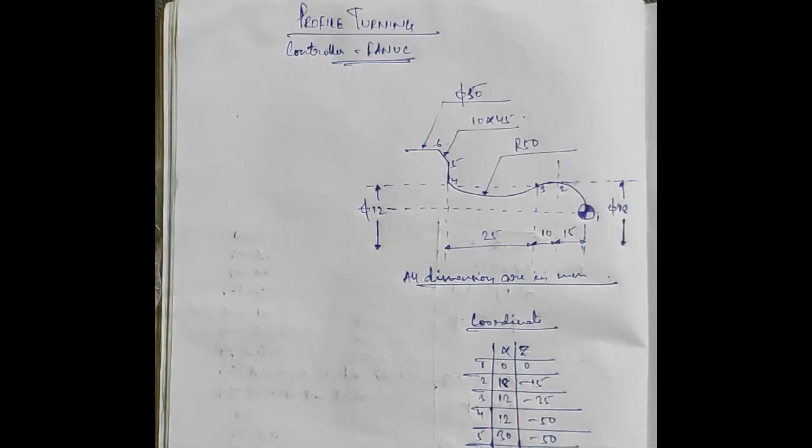Hello friends, today we are going to learn profile turning operation. Controller will be the usual Fanuc.

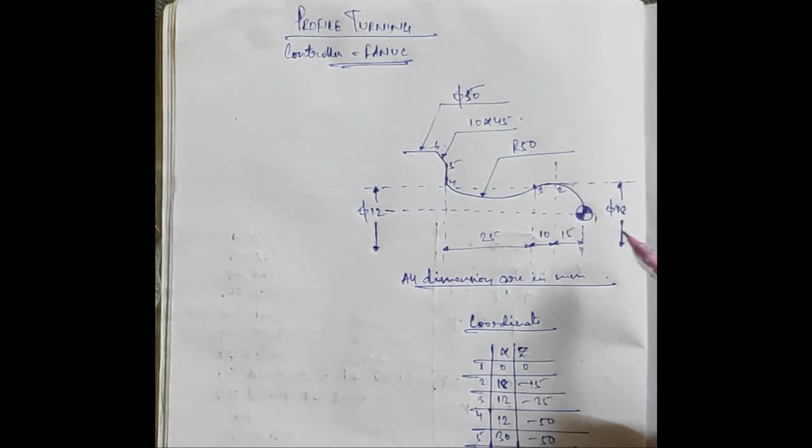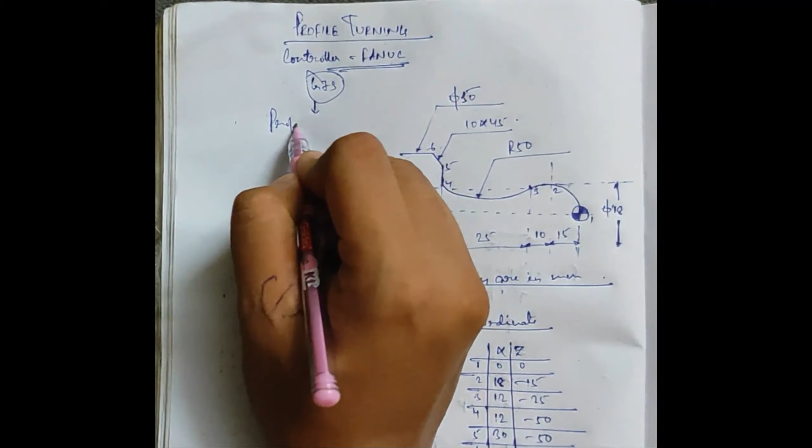Okay, so let's assume this is your profile. It looks like a chess pawn. We are using G73 for this operation, which is a profile repeating cycle. Let's discuss this profile.

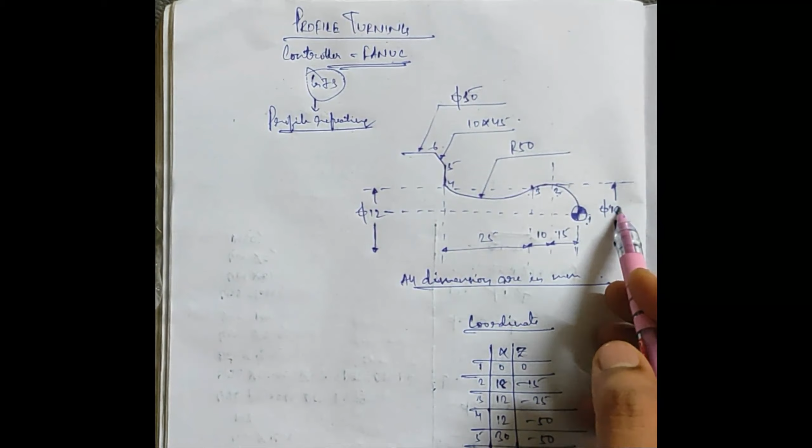This is your point number 1, this is 2, 3, 4, 5, 6. The coordinate for point number 1 will be 0, 0. Coordinate for point number 2, diameter is given, so X will be 18. Z is also given, which is minus 15.

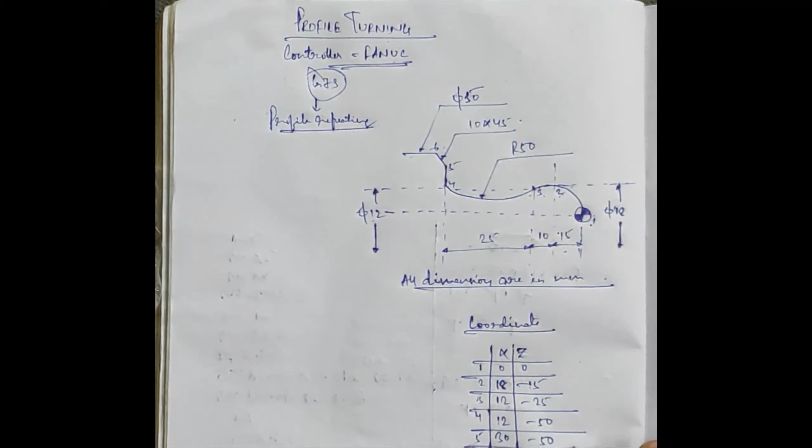Point number 3, X is 12, Z is minus 25. Point number 4 and 3 lie on the same line, so diameter will be the same at point number 4. So it's again X12, Z minus 50. At point number 5 X will be 30 and Z will be the same.

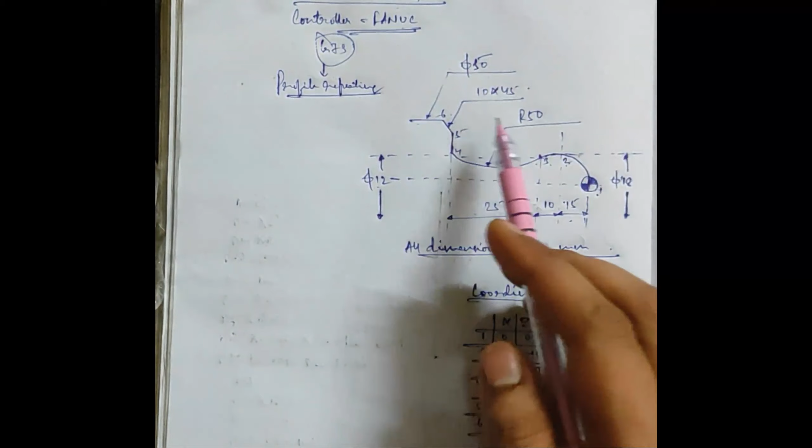At point number 6, X will be 50, Z will be minus 60. So let's begin the program.

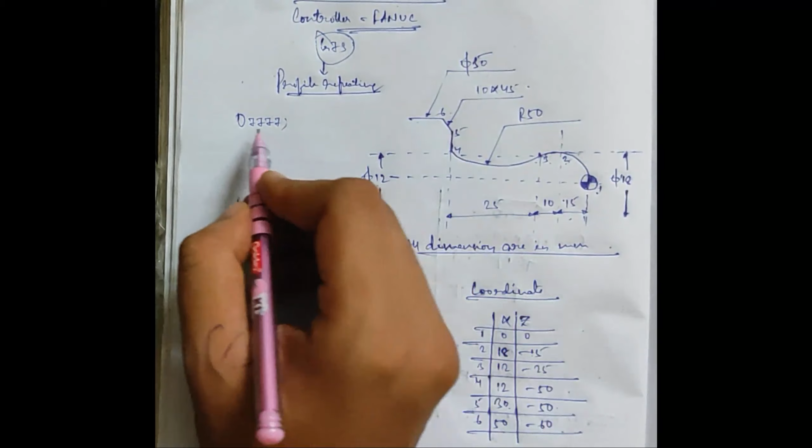G92, S1000, M4, G96, S300.

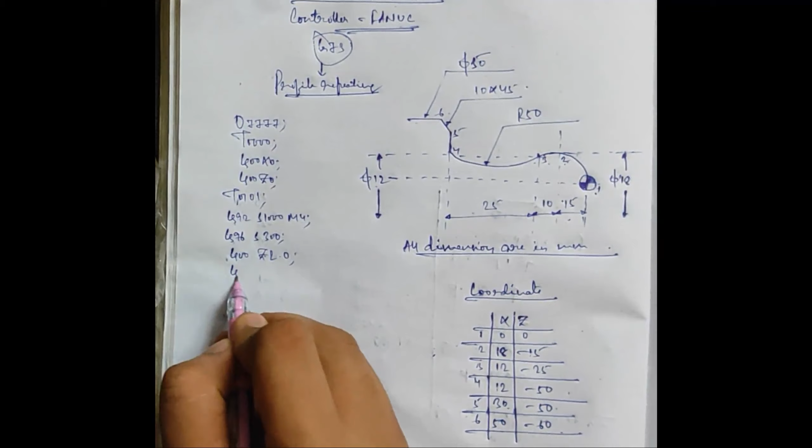Okay, then take safety: G00 Z2.0, G00 X52.0, then coolant on, M7.

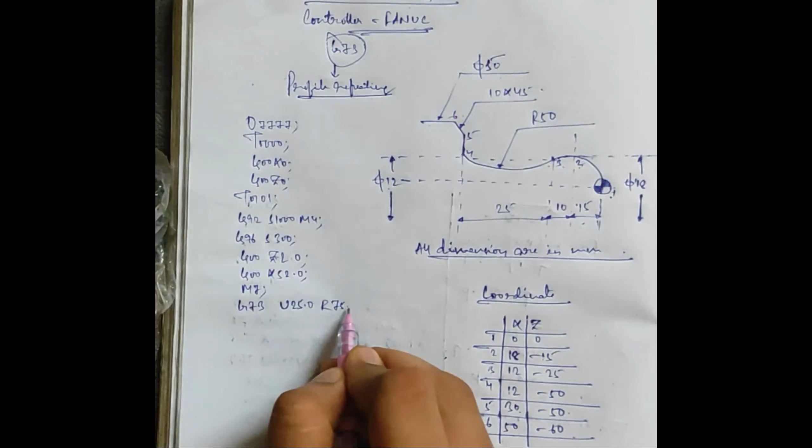So G73 is your profile repeating cycle, let's use that one. G73 U25, R will be how much? R will be, I think, 75 - we'll discuss that later. Let's first complete the program. Then again, G73 P10 Q11

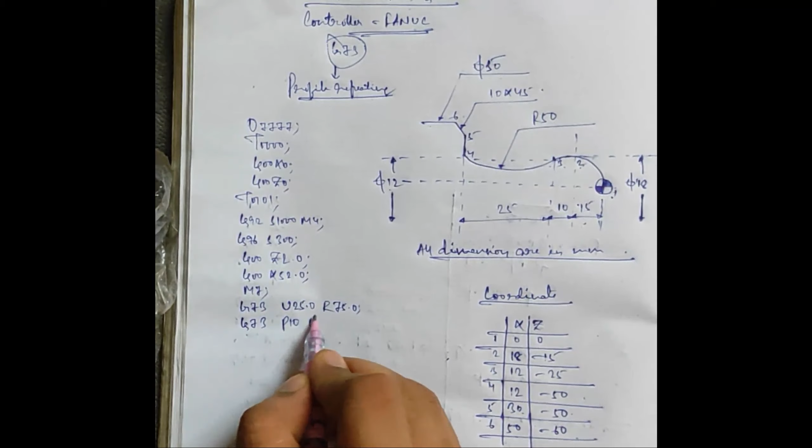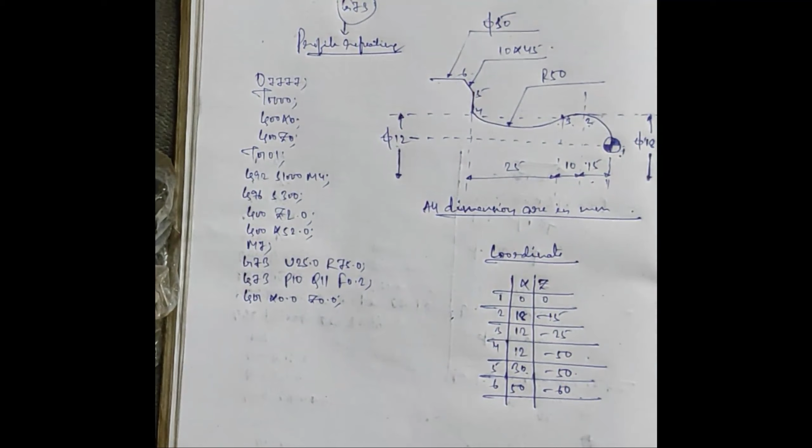F0.2. Now the coordinates start. G01 X0.0 Z0.0. And from point number 2 we are moving in anti-clockwise direction, so we are going to use G03 here. G03 X18.0 Z minus 15.0, R will be 9.0.

Again 2 to 3, it's again anti-clockwise: G03 X12.0 Z minus 25.0, R will be the same, 9.0. From 3 to 4 we are moving in clockwise direction, as you can see over here.

From 3 to 4 we are moving in clockwise direction, so we are going to use G02. X will be how much? At point number 4 it's 12.0. Z will be how much? At point number 4 it's minus 50. R is given as 50.0. Then point number 4 to 5 is linear movement, so it's G01.

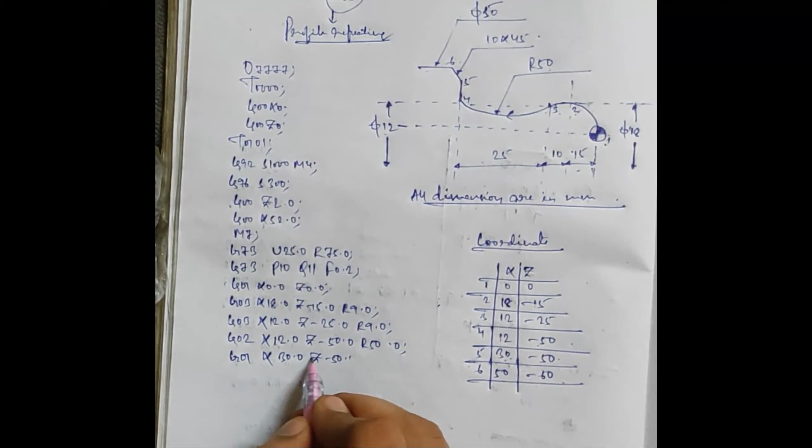Okay, so at point number 5 coordinate of X is 30, and Z will be the same, minus 50.0. Don't write Z over here, it will be of no use.

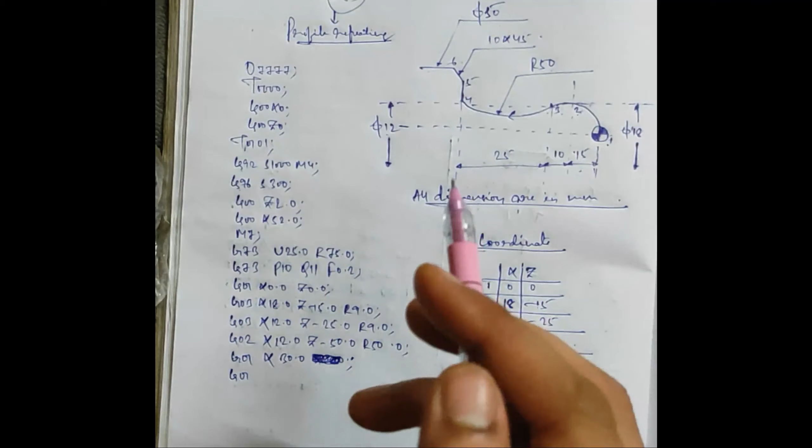So at point number 6, again G01. 5 to 6 is the chamfer, as you can see, of 10 by 45. So I'm going to write X and Z in a single block. X will be how much?

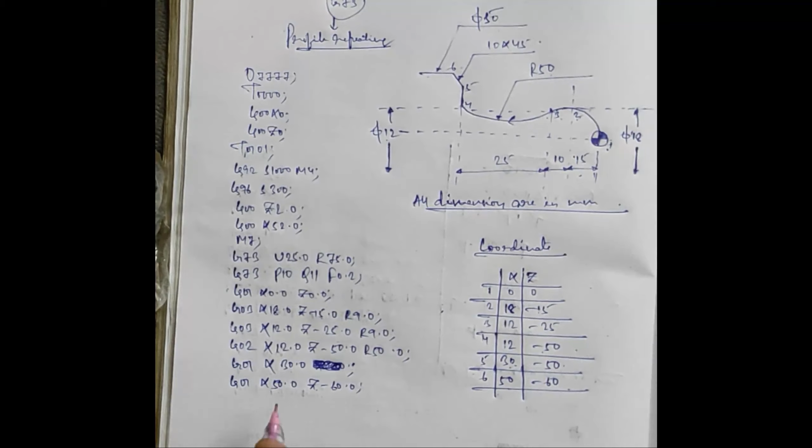50.0. Z will be minus 60.0. So after arriving at point number 6, then take the tool: G01, X will be 52.0 and Z will be Z2.0.

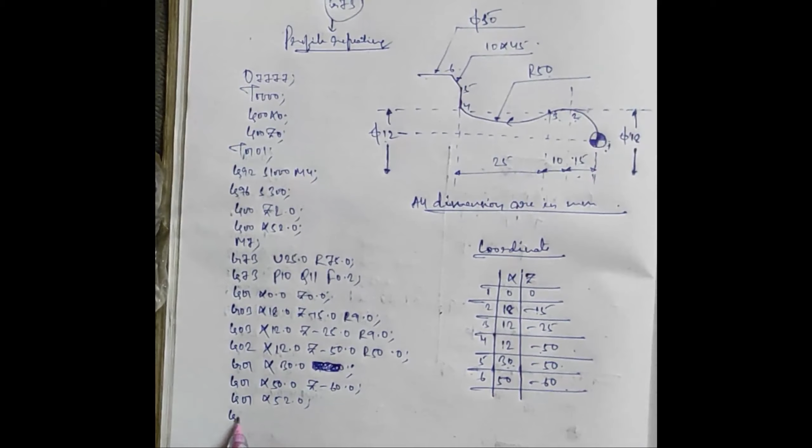Then spindle off, coolant off. G97 T0000. Then, as you know, it's homing: G00 X0, G00 Z0.

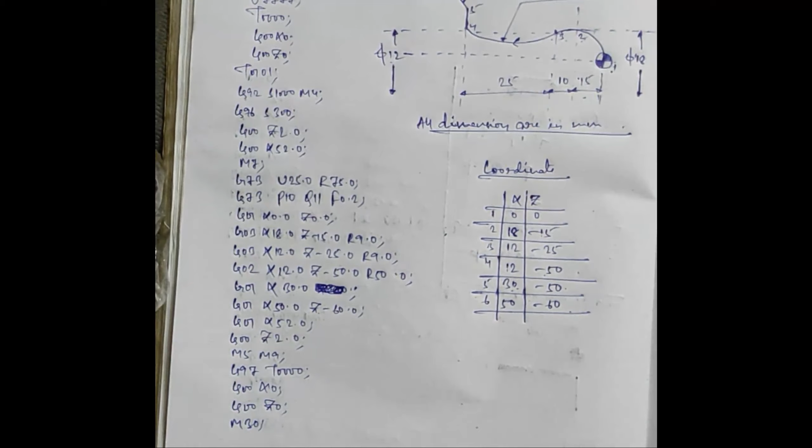M30. The program is not ended yet, we have to mention the block number. So it's N10, N11 will be over here.

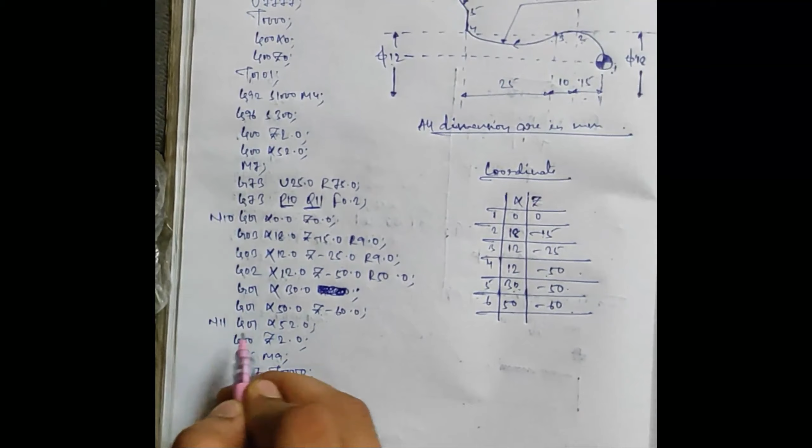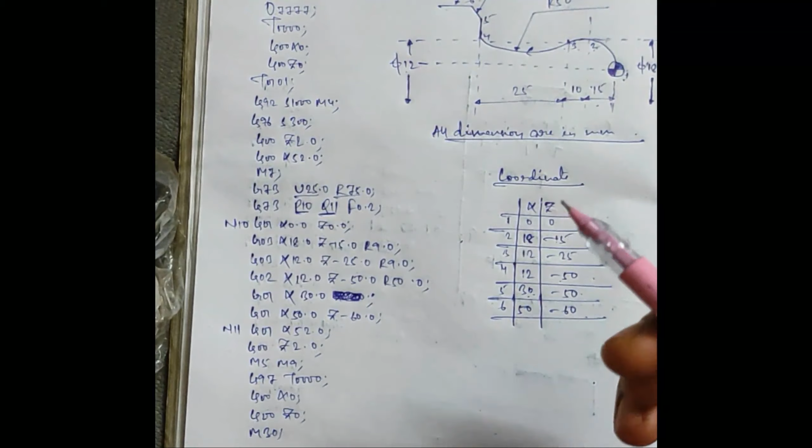So there is a new term over here, which is U and R. U and R implies something different from G71. In G71, U and R is different, and here in G73, U and R is different.

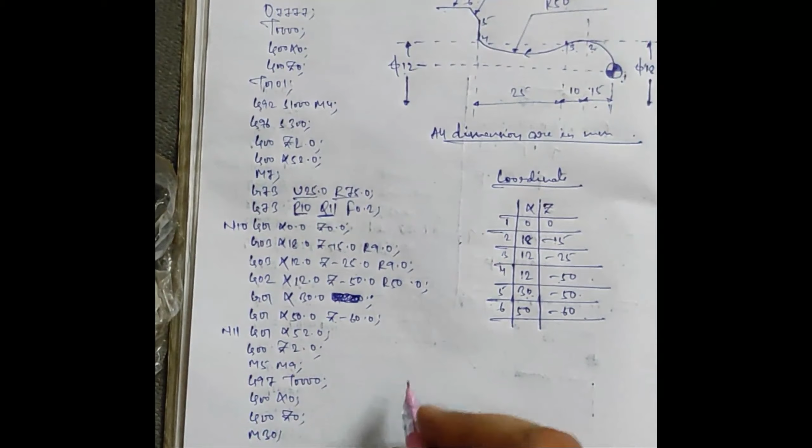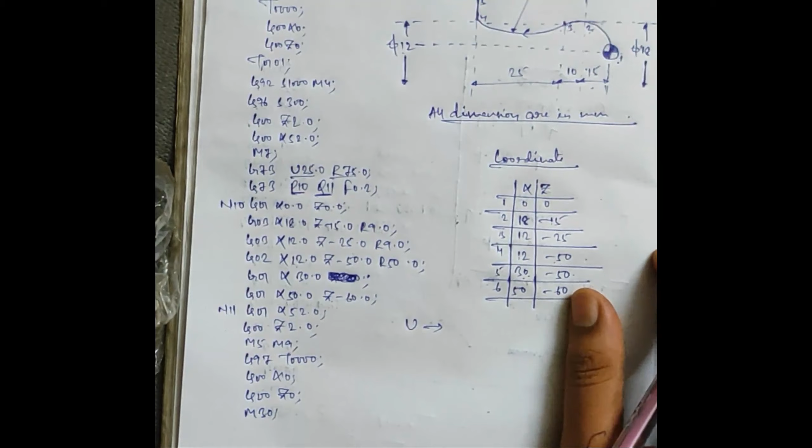So here U says the total amount of material removed in X direction. Clear?

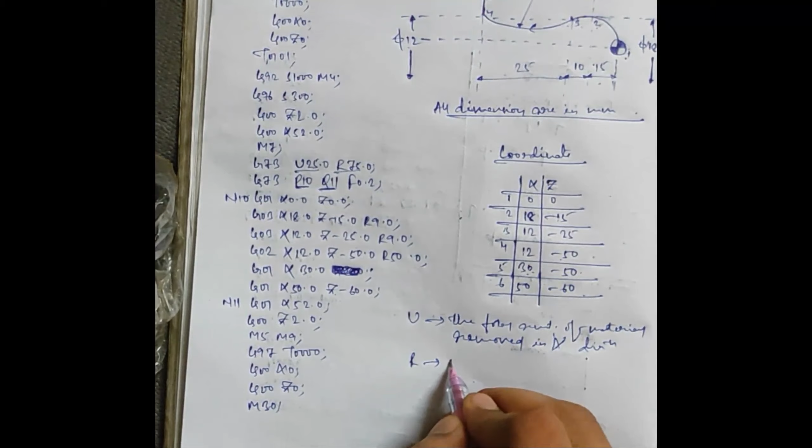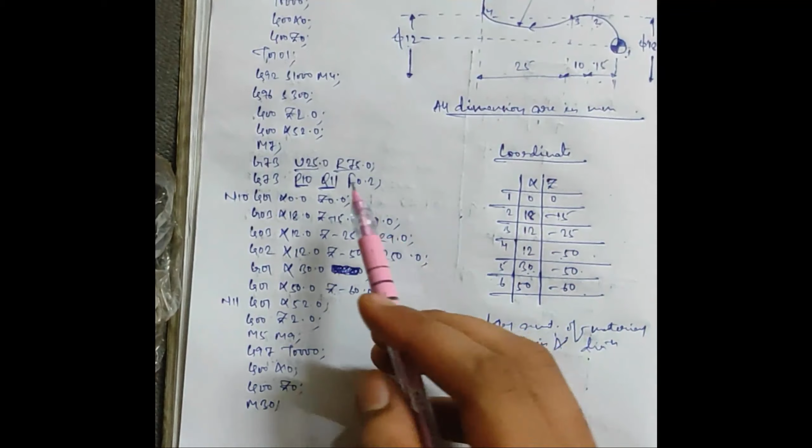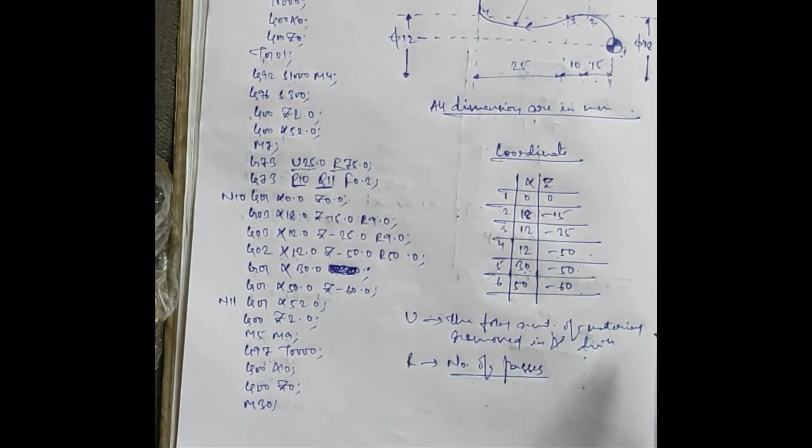Then what does R say? R is the number of passes. So how do I find that figure, 25 or 75? Let's talk about that. So in U I write 25. What is U? U is the total amount of metal you removed in X direction.

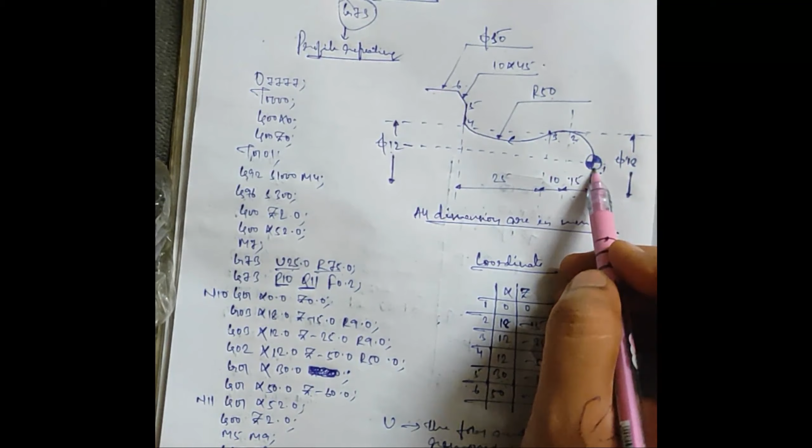So first go through the profile. Your maximum diameter is how much? 50. Minimum diameter is 0. So it will be maximum dia minus minimum dia, divided by 2. U will be 50 minus 0 by 2, which is 25. Clear? That's how I got that figure.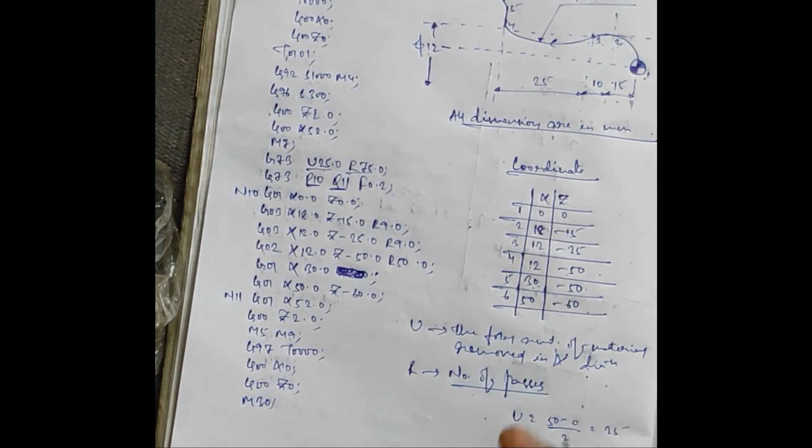Then let's talk about R. R is the number of passes. How are you going to find out the number of passes? Let's assume in one pass you remove 0.2 mm material. So you have to remove 25 mm material. So how many passes is required to remove that 25 mm material?

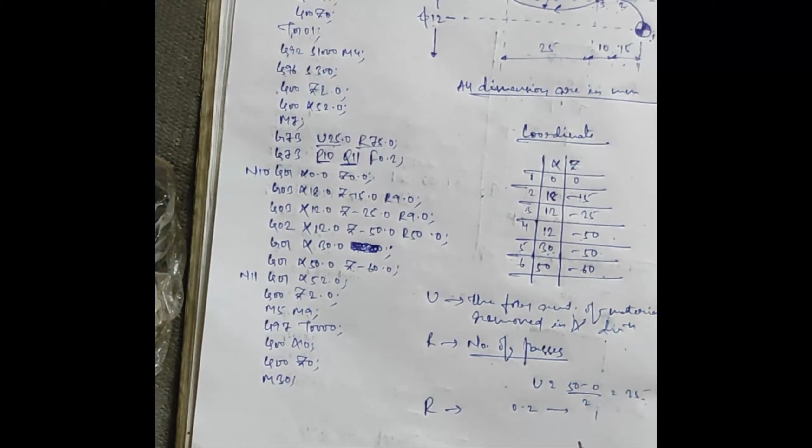It's a simple unitary method. 0.2 mm is removed in one pass. So 1 mm will be 1 by 0.2, which is 10 by 2, or 5. If you want to remove 1 mm, it will take 5 passes. So to remove 25 mm material, it will take 25 into 5 passes, which is 125 passes. So here R will be 125, not 75.

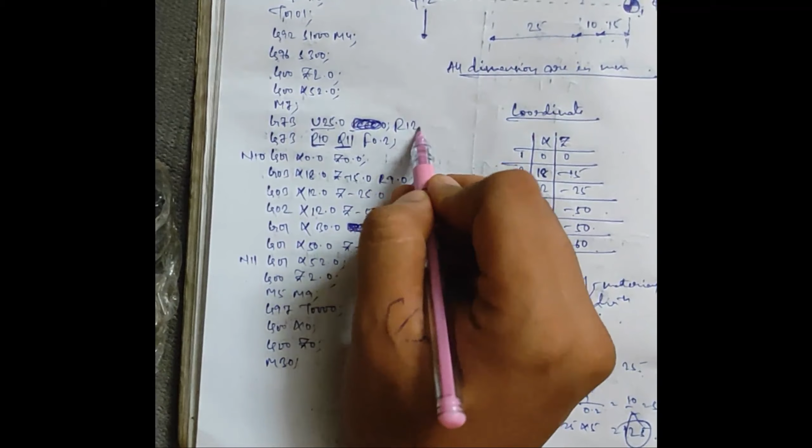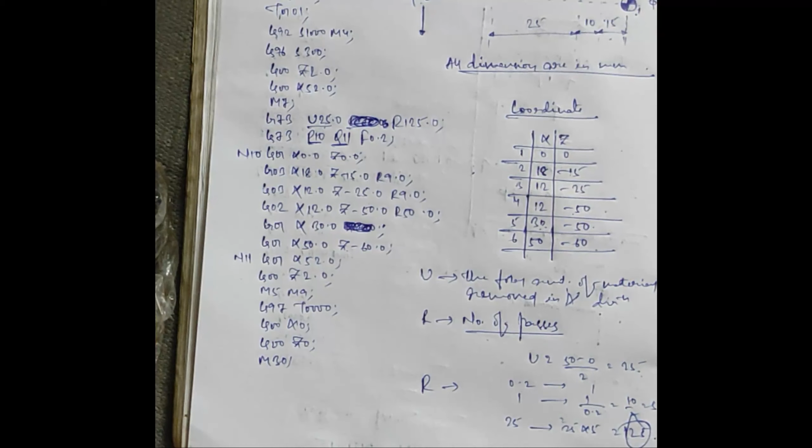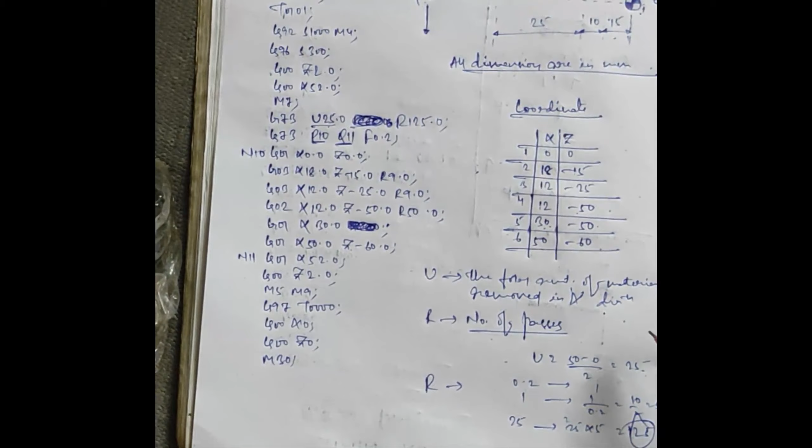R will be 125, clear, not 75. So this is how you're going to find out the value of R. So this is all about your profile repeating cycle. Your program starts from here, from the program number, and ends over here.